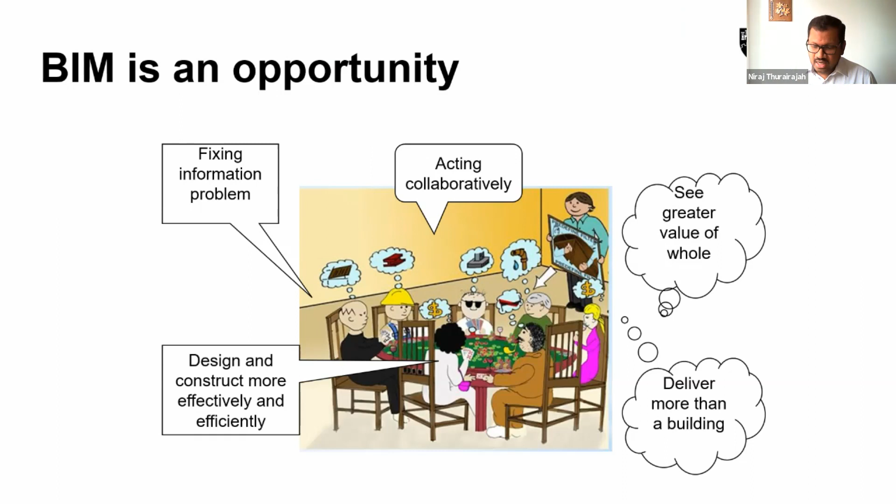Now, governments see this differently. This is from an engineer's, from a contractor's point of view, but governments see this as something that allows people to communicate with other sectors and other buildings. So they are not just talking about a single building, they're talking about a series of buildings. Let's say the Ministry of Justice decides to bring all the buildings in Sri Lanka onto a digital format connected to each other, so that there is a standard for each and every building. We know when something goes wrong in a building, we know what is going wrong in the building.

So governments normally, in the UK, there was a report in 2015 called Digital Built Britain. That particular report talked about how different industries can come together. So you have a building and there is a problem in the water supply. Yes, it's a building related problem, but it is also a water supply related problem. The ability to identify there is a problem and then connect with other industries is very important.

So the idea for government is to use Internet of Things. You would have heard of sensors, so put sensors in the building. Without connecting sensors to a model, they're just sensors that produce numbers, they have no meaning. Once you have sensors in places attached to a model, then you know in a digital representation what sort of information, the information about the building on the model, live data on the model. So when there is a problem, then you can identify and address those things. And you can see that is where this Internet of Things, Internet of Smart Construction and Services comes into play.

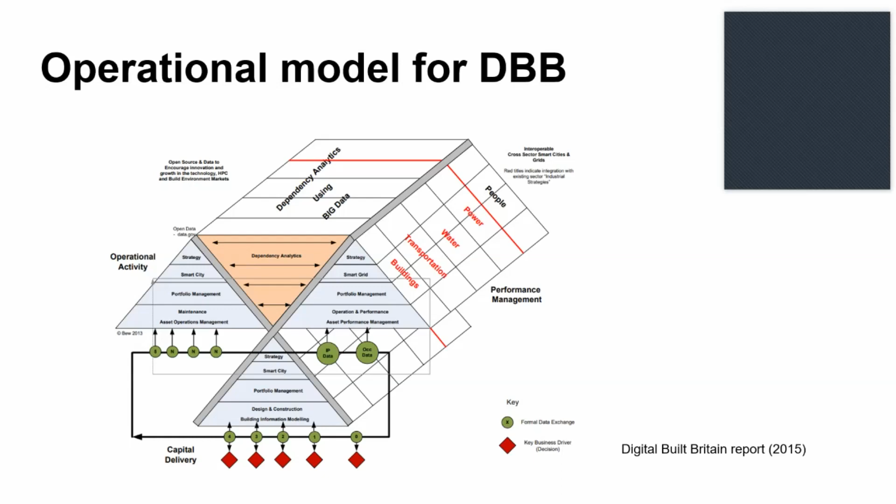Sorry, is it? Okay, okay, so.

Let's talk about building information. I talked about why we need to do building information modeling, why governments are pushing everyone to do it. But now let's talk about what we can do with it, what to do with building information modeling.

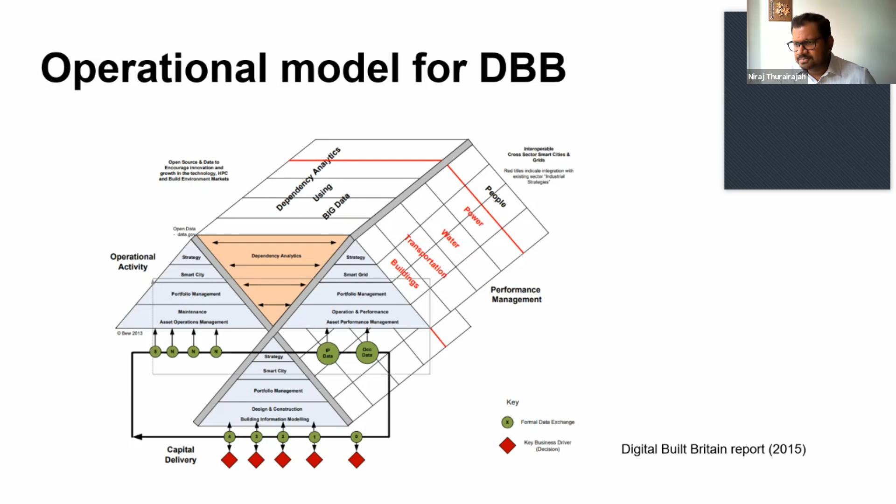So we are going to talk about how to implement and use this. I'm going into this idea of building information modeling - we are going to talk about implementation. How do we use building information modeling? I'm going to take three different perspectives so I can go one by one.

I'll talk about, first of all, the process perspective. I'll move to the product perspective, and I'll talk to the people perspective. There's a comment, and I quite like this comment, trying to understand positives and negatives for building information modeling.

I think positives are overwhelming, but at the same time it's important we understand the negatives, understand the challenges to move forward. Because I believe at some point it is going to happen to all of us. So if you are an early starter, you have an advantage. I think that's important. That's how I saw it, and nowadays I do various different things because I started early on building information modeling.

Okay, so let's go into the process perspective. Building information modeling normally adapts a perspective called integrated project delivery, we call it IPD. The idea is that it is slightly different - it is different from the traditional delivery.

And I think it allows you to bring the project in a much shorter time. Some of you may use the term novated design and build procurement method - D&B. It's very similar to the integrated project delivery mechanism.

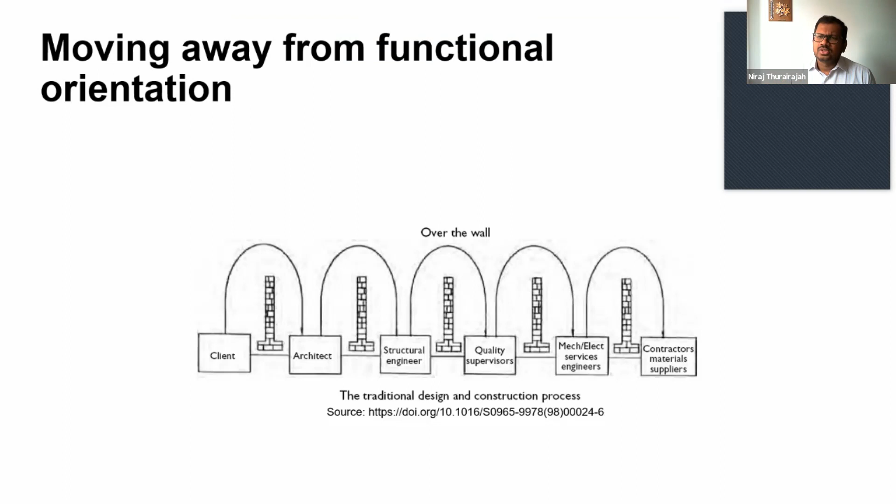You would see more of these things in Sri Lanka, not just in Sri Lanka, even in the UK it's the same story. There are projects which use very similar models. But a lot of people have recognized this is not working. This over-the-wall approach is not providing optimized solutions, so they want to break that and move to a much more collaborative environment in which they can work. So they move on to something slightly different.

I'm comparing two things: a traditional design process against an integrated design process. In the traditional design process, what happens? The client and the architects work together talking about what the project is, at the very beginning. Then they produce construction drawings, which show how they are going to do the work. Then they go to tender, select a contractor, and ask the contractor to finish the work. That's the traditional way.

What is the problem here? We are deciding what we are going to build without any understanding of how we are going to build, or who is going to build it. And that is a problem. So integrated design allows something slightly different.

What it shows is that at the very beginning, instead of just designing your project, you select a handful of contractors, maybe only 2, maybe only 3. You go through an early-stage process to select a few contractors with whom you can then work together - the client, architect, and contractor start working together in producing solutions.

So at some point in the project, at the tender stage, you have now 3 designs, with 3 different contractors, if you've selected 3, each going about the particular project differently - let's say you wanted an auditorium. Different contractors will come up with different solutions working with the architect. They won't be that different because the architect guides them towards a particular end goal, but there are different solutions there.

This is called integrated design delivery, or integrated project delivery. Most government projects in the UK and specifically in the US are moving towards this sort of delivery, because it allows people to start early and realize the potential of the project.

There is also a slightly different reason for it. This is called the MacLeamy curve. If you see number 1, the white curve - almost hidden - it shows that if you do changes at the very beginning of the project, it has a huge impact on what it's going to look like at the end. If you want to change things in the latter parts of the project, it has very little impact on what you produce as a building. So try to do the changes as early as possible.

Now in terms of cost, at the early stages it's very cheap to make changes because no one has done any work yet. It becomes very expensive to make changes in the latter part of the project.

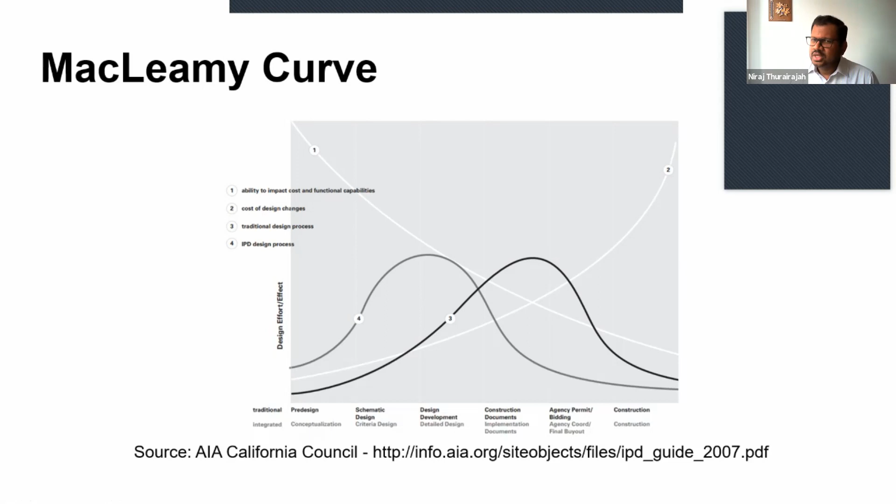So that is number 2. They have mapped the traditional projects against IPD, the integrated project delivery, and they show that actually you spend less because you make changes at the early stages and have more impact on the design from the early stages. Overall, you produce a better project.

So that is a process perspective for building information modeling, because that is what most governments, especially in the UK, US, and Middle East and various other countries, are trying to push - a much more integrated way to approach building information model used projects.

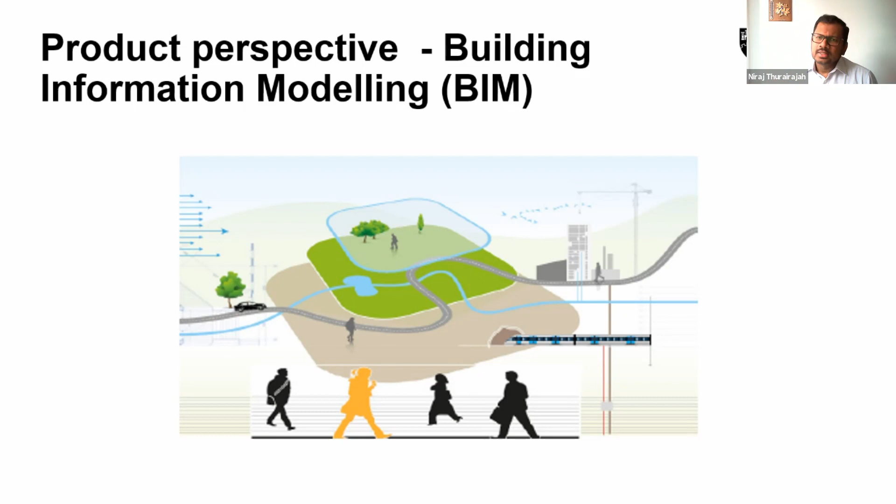Now let's take a product perspective. Let's talk about BIM as a technology, as a digital tool that you can use. A lot of you would have seen BIM as a digital technology, as a software. Remember, they are all combined together, it's not separate, but when we separate it and look at it, this probably gives more meaning if you're thinking about BIM as a product, as a software. So what does BIM as a software enable you to do?

What normally happens in modeling or drawing is that you have different sets of drawings coming from different people. Similar to that, in models it's the same story. There is an architectural model, a structural model, a mechanical model, sometimes a separate plumbing model or electrical model. So there are various different types of models.

I worked on a project, not a big project, a small project, but they had 7 different models, and one of them is the model from the specialized lift contractors, because they had their own model, own BIM model, designed on how things are needed for them.

Now, you can look at them, you can print out separate drawings for all of them, but the problem is that they are all separate. How do you imagine them all together in a single 3D space, a single environment? Normally, as engineers, you would do that thinking - you would bring that in your head. Okay, this is how the architectural drawing is going to look like.

This is how the MEP is going to look like, or this is where the wire is going. You are imagining that in your own mind. It's very difficult, and normally you wouldn't see that in drawings - how these things are presented. They are not presented in drawings. So it's always a difficult thing to do.

How many times would you have seen where a duct or pipe coming together in the MEP design shows that it has to cut through a column and go to the other side, because people haven't decided on the size of the duct, so later the duct got bigger. So in the drawing it looks like the duct has to go through the column. And as we all know, it can't happen - we shouldn't do that, otherwise the building will come down.

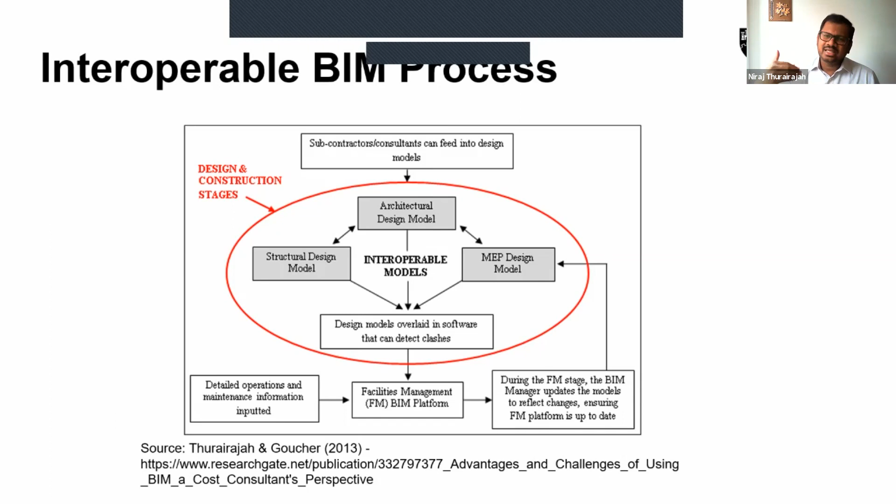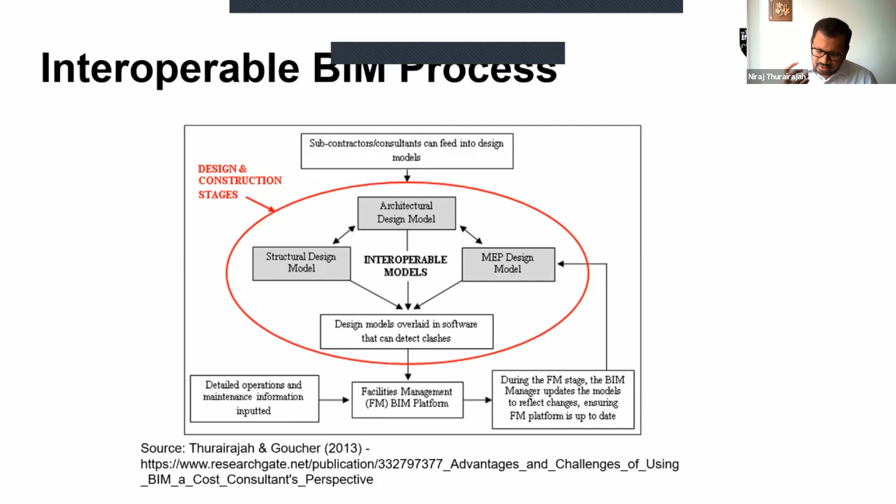Once it's handed over, it can be used for operational and maintenance purposes of the building or asset. So you can see it goes beyond just a single model for a particular purpose. It can be updated and used for various other things. That's how the technology and the BIM model works.

Now in the UK, and this is widely accepted across the world, this is how we define levels when it comes to BIM. If you are using just paper and nothing else, we call that level 0. When you are in level 1, you are using 2D drawings and 3D models, but you are not actually connecting them. For example, you are not putting these models together.

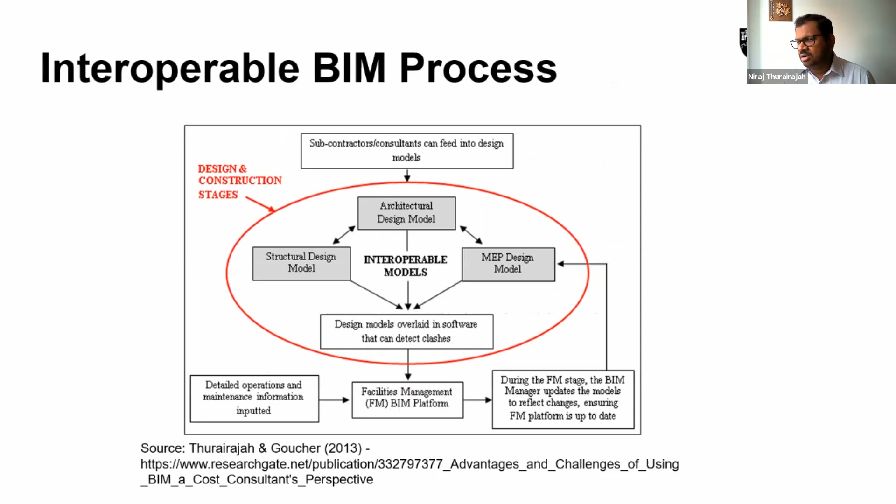I talked about different models coming together in a federated model. That doesn't happen in level 1. It's just single models, people producing them for various different purposes. This is where, like in newspapers, you see digital visuals of housing and things like that. I've seen this in Sri Lanka, and they are 3D models. I call them dumb 3D models because there's no information behind them, they just look like a building, that's all. That is level 1 in that sense.

Now level 2 is what we normally push everyone to move to, where you have models that have information behind them. So when you have a 3D model with a window, when you click on it, you know it's a window, you know what sort of glazing it has. You can get information about each and every product component in a model, and that is BIM-based design. That is level 2, and at the moment we are proposing that level 2 happen.

Now level 3 is where we start integrating everything else. Remember I talked about digital built Britain, about models connecting with other industries. You put sensors in, let's say in a water pipe, so you know the flow and the problems in that flow. Let's say after some time your sensor tells you the flow is reduced between this point and another point, so you know there's a blockage in between. Things like that can be done at the next level, that is level 3. That's where governments want to move, that's the next stage.

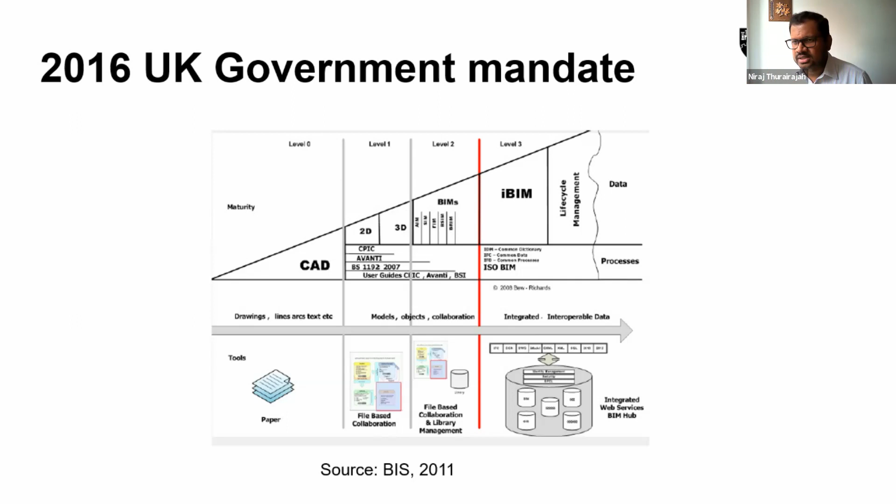So what are the benefits of using building information modeling? Someone asked what are the benefits, negatives and positives of it. First of all, the idea is, as people sometimes say, it's a single truth, meaning everything is in a single file so you can always go back and say this is where the information is. This is important because normally you see different types of information in different places. A single file allows you to bring all of them together in a single place and provide that information to be shared. That's very important.

Second is parametric objects. What do we mean by parametric objects? Let's talk about walls, windows and ceilings. If you have ceilings and walls in an AutoCAD or CAD model, you put a wall all the way to where the ceiling is, say 4 meters, and the ceiling comes on top. Let's say in the model, instead of 4 meters you say only 1.5 meters, but the ceiling is at 2 meters, meaning there will be a gap. That's what you would normally expect in an AutoCAD or CAD environment.

In a BIM environment, what happens is each and every component, such as the wall, is one component, the ceiling is another component, and they all share a relationship. For example, if you lift your ceiling by 10 centimeters, all your walls will automatically extend to fill that gap. You don't need to do it one by one, because there is a relationship in the BIM model that says the wall should be connected to the ceiling. So if you lift the ceiling, the wall will automatically extend.

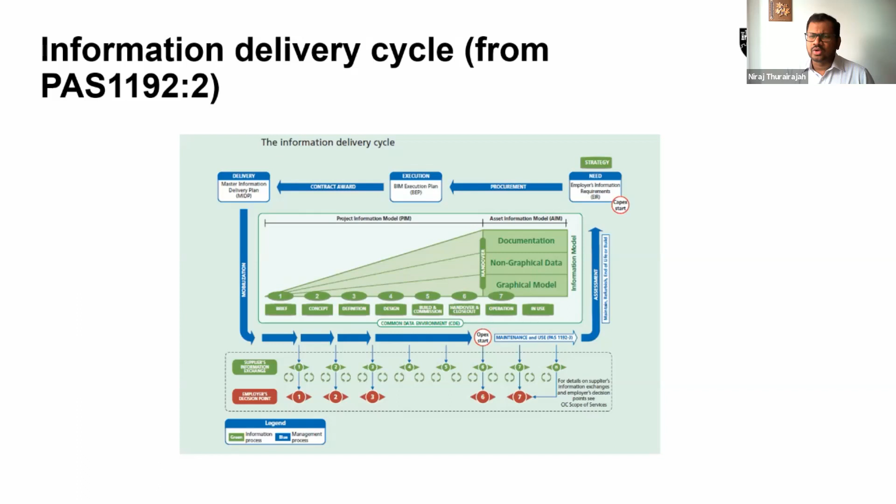Now then we go into construction, you have a master information delivery plan. In the UK, contractors and consultants are guided by certain outputs of information, producing different sets of information at different stages. At the end, you produce as-built information, the as-built BIM model that could be used for other things. So the standard talks about various different things in that project. I'm not going into full detail since we're mainly talking about what this is, but this is much more detailed information on what needs to be done when using BIM.

Now the important part I'm going to talk about is the people perspective. We talked about IPD, integrated project delivery, as the process behind building information modeling. I talked about the technology and product view, what sort of technology could be used, and details in the earlier section. Now I'm going to talk about the people perspective. I think this is very important.

The idea of whether you want to use BIM or not to use BIM is very much a people perspective. It's very much perspective from people who are in the project, the client who is running the project. So that's very important to understand. So we are going to take a people perspective in this case.

Most of the time, if you are new to building information modeling, people get a bit confused, and people normally avoid it. Oh, I don't want to get involved in building information related projects. This is not going to do anything good. It's just information and people can take this information and run away. I worked with a lot of quantity surveyors and they say, if I put information, people will take that information and use it somewhere else. And that's not true, but that's how they think about it.

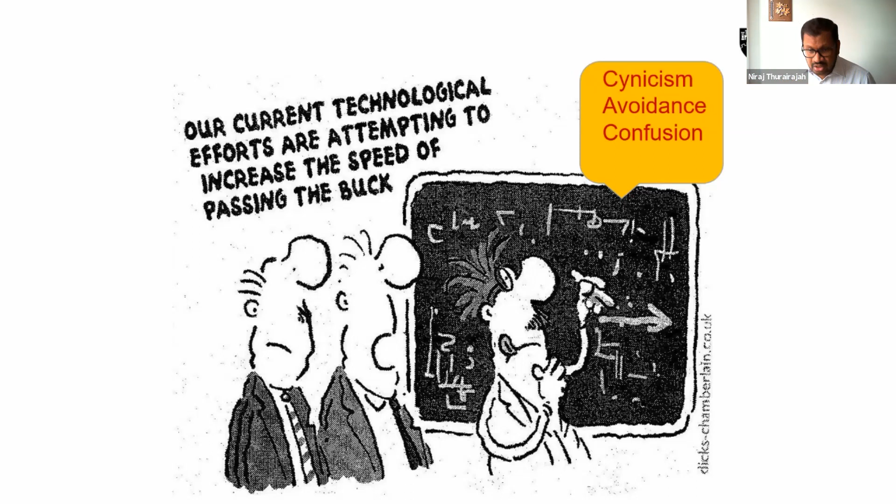So it's quite difficult. This is where we start. If you are not used to building information modeling, it's a change, it's new, so it's always a bit of a difficult thing. That's where we start from.

And of course, there is a hype behind BIM. A lot of people talk about BIM as something big. You can do that and things like that. What is happening with BIM in the UK and other places is that there was a big hype in the early 2010s, 2012, 13, 14.

But then it reduced, and now we have settled down and said we need to use BIM. How do we use BIM? So we have come to that stage now. The hype has sort of gone down. At the very early stages, it's a major hype, nothing major than that. So it's important to understand that certain products could be hyped, and it's important that we go beyond that hype to see what is its potential and how do we use that one if needed. I think that's important.

The problem with BIM is about managing the BIM use. I think that's very important. If you are working in a BIM project, it's about how do you manage to make BIM work. I think that's also very important. It's just a model, a process, a set of guidelines. It's not going to do it for you. So how do you then work with BIM and other people in making it work? I think that's very important.

As you know, people are different. Everyone thinks differently, works differently. Every organization is different. In a project, there are several different organizations. And as professionals, you are involved in various different tasks, and the information that you handle in each and every task is different. Some of them are geometrics, different types of information comes to you. So you can see how chaotic it would be when we are trying to work in this environment.

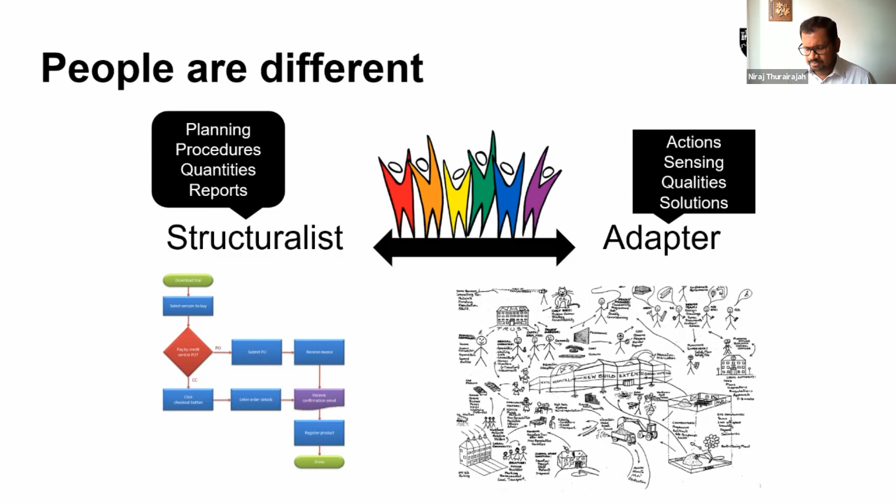Calculations are your normal ways of doing things. But I don't want to stereotype structural sort of engineers in such a way, because I have worked with engineers who are much more adapters. So it's not easy to say, it's not a general view. However, most of the engineering courses allow you to, or make you think in a very structured, methodical way. I think that's important, that's what your learning goes into. And when it comes to tasks, there are tasks that need judgment. So you judge a certain situation, look at the people, and make a decision.

There are calculative tasks that allow you to say what is the size of the column, or what is the size of the reinforcements you need to put in a particular column. That's very much the calculative part. As an engineer, part of your learning is about calculations and how to calculate those things.

That doesn't mean you're not making judgment, but there are a lot of calculations involved. Building information modeling is a really good tool for someone who's more calculation oriented, as well as someone who sees the world in a much more structured manner. So for most engineers who are taught in a calculation-based, structured way of learning, BIM is an ideal thing to look at. But that does not mean you are not adapting judgment.

This is where it's important that you work with people and understand how to make judgment when the calculation doesn't work, when the standard tables don't work because the situation has changed. So you have to come up with new calculations or make a judgment from what your calculations show. It's important to see the world differently in that sense.

Now, the important part is don't try to use BIM for everything. I think someone asked this question, trying to understand the negatives and positives - should I use BIM? It's very important to understand that BIM is not appropriate in every situation. If the situation is very chaotic and complex, BIM will allow you to structure it. If the project is simple, sometimes using BIM could make it more complex. So it's a judgment call for you to see whether you want to use it or not.

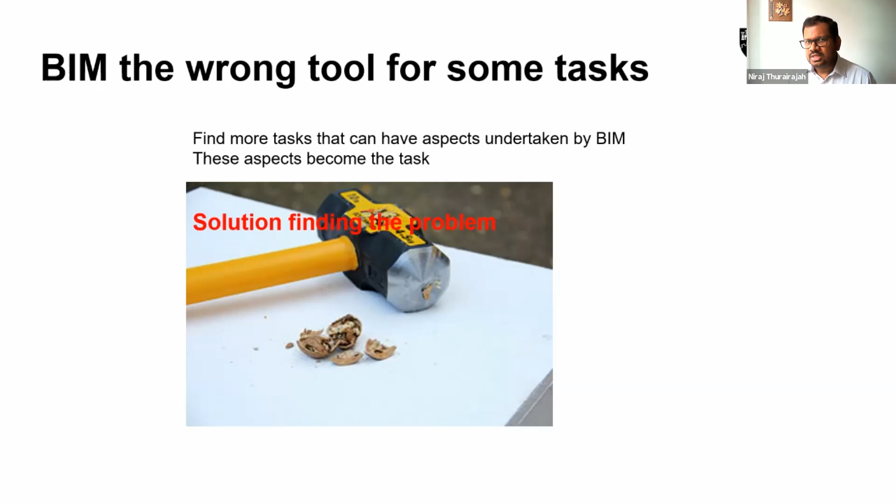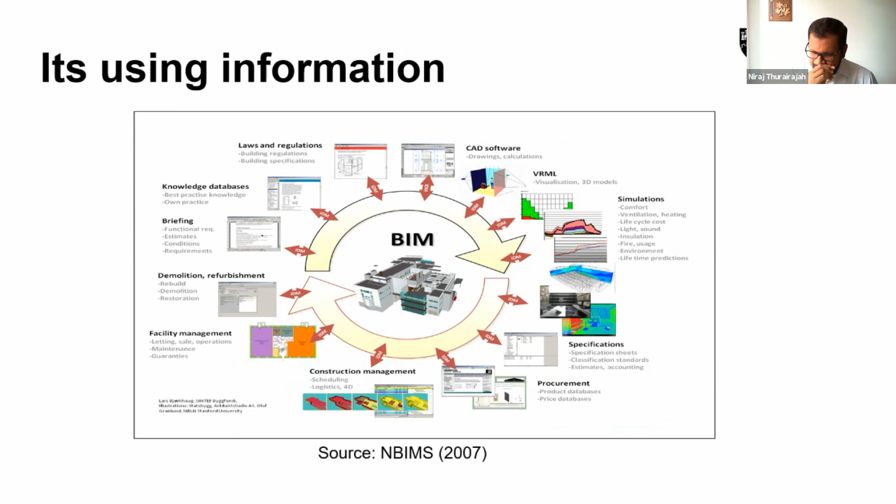Now, an interesting question. I worked on a project, and this was their first project, and the project manager said, provide all the information that you have. Everyone provided information, and later they found there was so much information they couldn't make head or tails out of it. So on the second project, they decided they would specifically ask for certain information. It's important to understand BIM could be used in various different projects, and at various different stages for various different activities. It's all about information - understanding how that information is used and what benefits you can get out of it. I think that is an important task.

In a project environment, when it comes to building information modeling, remember BIM is only part of the project - it only provides partial information of the project. It is not the project, it's a 3D environment. I have seen project managers trying so hard to manage the BIM model that they forget to manage the project. It's important - the project is separate. The physical environment needs to be managed on its own. The BIM bits allow you to manage it better. Don't try to manage the BIM on its own.

So that's why normally we suggest bringing a different person to manage BIM, but if the project manager, engineers and architects don't understand what BIM is, then it cannot work. So the understanding is important from the point of view of engineers, as well as from the project managers, modelers and information managers.

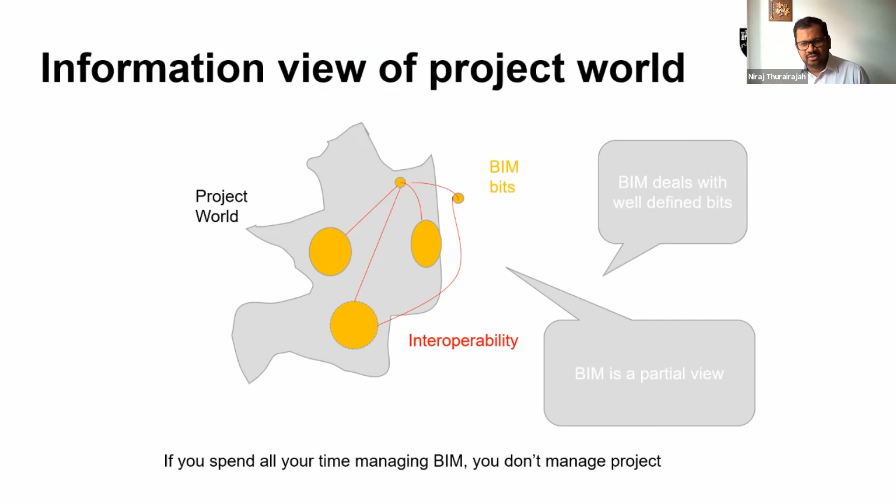The most important part for me here is that BIM only provides a partial view of the world. Therefore, it is important that we see the normal project as a project and only see BIM as partial information.

Some of the concerns and issues I found, and I'll go back to this later, is that sometimes there's an issue of interoperability. You're working on one version of a software and transfer to a different version, and suddenly windows or staircases are missing. I think that's a problem. It's becoming better now, there are more rules and a common platform to transfer. But if you're using old models, that could be a problem.

The famous example is a French software called CATIA. It allows people to model parts of aeroplanes. One of the Airbus projects had a problem in design because they used two different versions of the software and ended up missing certain parts, which led to a major information-related problem. So it is important to watch out for interoperability issues between different softwares and different versions of the softwares.

Again, it's important for us to know that it is professionals who are involved in the work. The information only provides a partial idea. You can't understand the whole thing by just looking at the digital models, it's important to talk to people. So sometimes the meaning can be lost because we just see the digital model. It is a concern because a lot of people just see the model and say, oh, we got the information. It is not - there is someone designing those things behind all the models, the information and the numbers. It's important for us to talk to that person and get them involved in the projects.

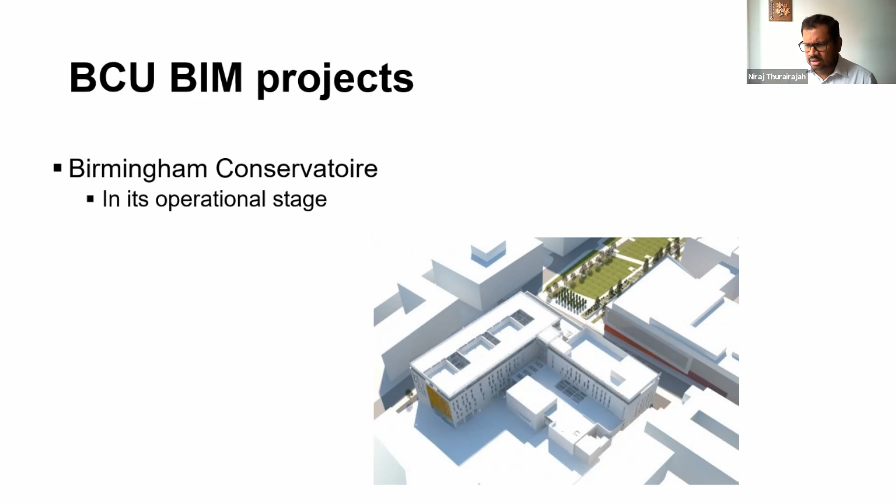I got involved in three different university building projects in Birmingham. One is called Parkside Building, the second is called Curzon Building, and another one is called Birmingham Conservatoire. All these buildings are completed now. They have BIM models and are in the operational stage of the building.

Before I go into this, I'm going to show you one of the buildings and how it was built. Okay, pardon me, I'm going to switch from one to another. I thought I got the correct one. Sorry, let me open this. Okay, I don't think you can see that yet. Give me a second, let me share it.

Okay, I hope you can see this screen. So this is a video of an actual construction of a university building. Can you confirm whether you can see it? Yeah, can see it. Okay, brilliant, thank you.

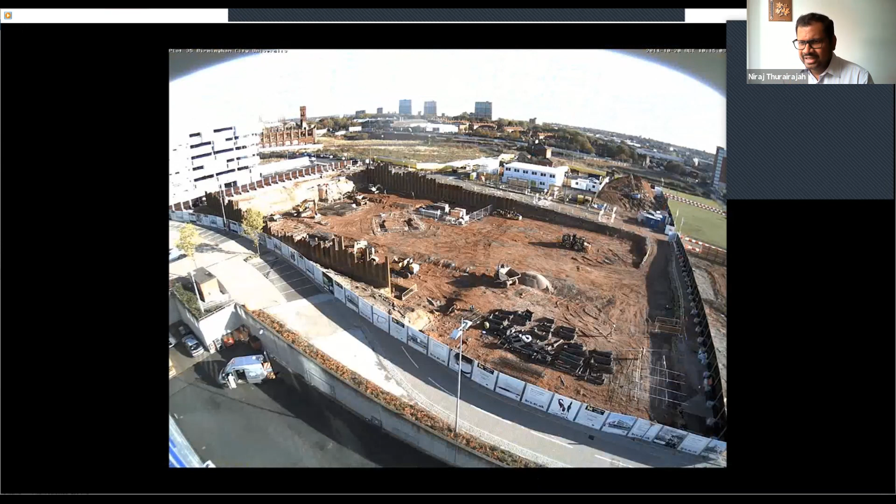So I'm going to run this one. This is an actual building construction, not a digital model. You can see what is happening there. There's no sound, so don't worry about that.

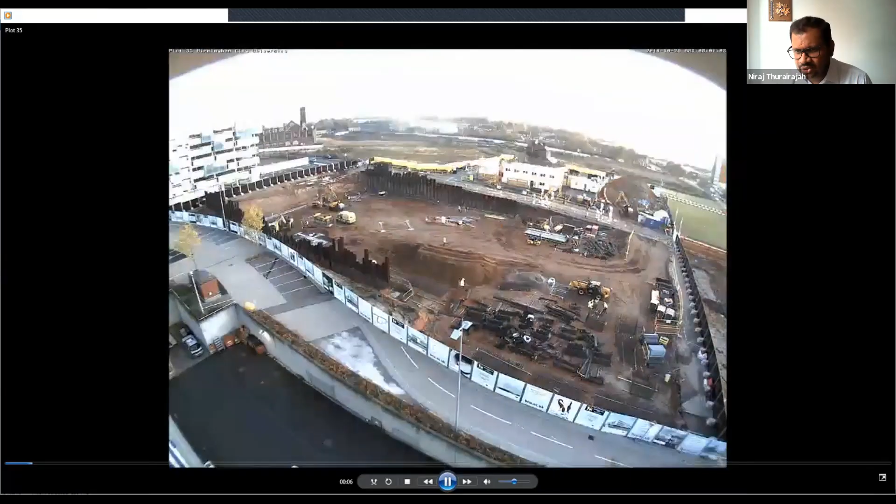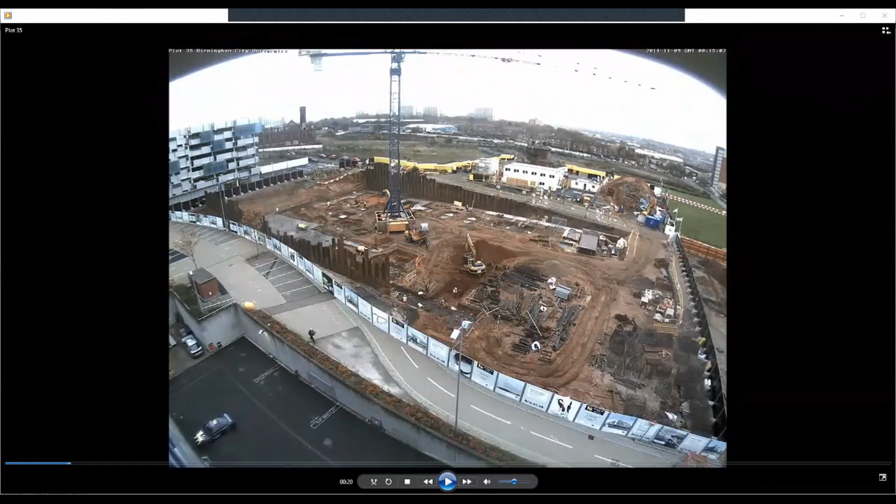We had a camera that continuously captures work happening on the project. I hope you can see it's moving. Sorry, can you see it's moving? Yeah, there's a little bit. I think your coverage is a little bit of a problem. Can you switch off your webcam? Then I think it's easier to view that video.

Is it better? Yes, okay.

So you can see the ground floor is going up. They have put a crane to start the building. You can see baby dumpers and various other things moving on.

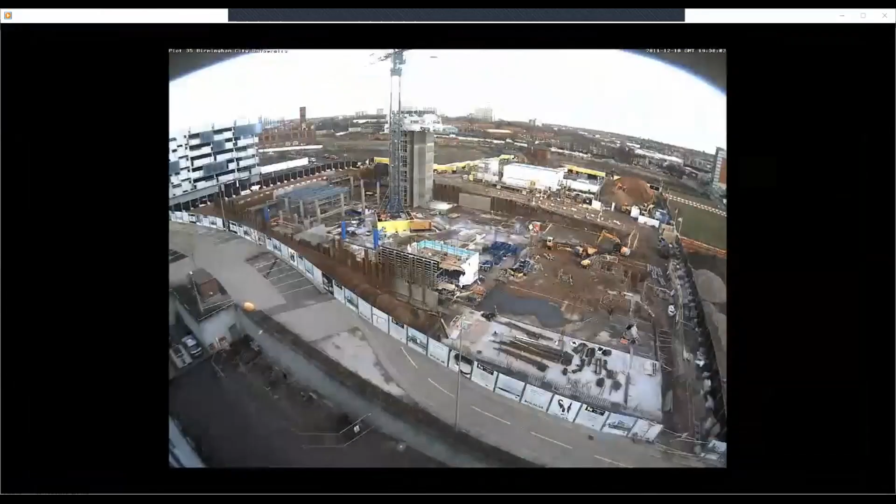So here you can see something is growing up, and we are using what they call a slip form building. It just goes up a few centimeters a day, 10 centimeters a day. You build slowly, the core is built like that.

And you can see they have finished the core, they are starting the external, and then now they are going to the second floor. Second floor is getting concreted. I'm going to skip a few seconds because you can see if the first floor is complete, the work is still ongoing, the concrete columns are coming up.

And the next floor will start coming up from there. So you can see the next floor being built. There are some construction joints, so not all the floors are built at the same time. I think there are three construction joints here, you can see three bits going at different times.

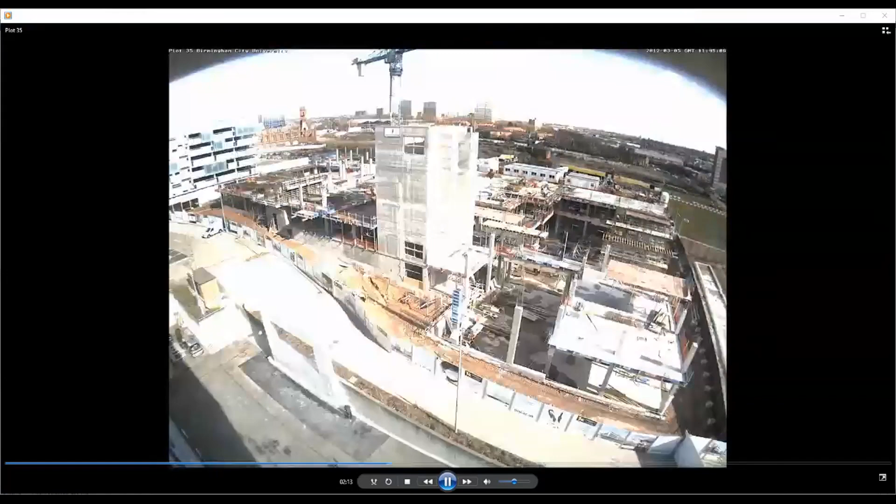We go to the next floor. You can see floor by floor, things are going up and people are finishing it. This area you see at the very front is an auditorium. They have taken 2 floors of space to build it, with columns on the back and steps on the side. What you see on the left-hand side is the connection bridge between the existing building and the new building.

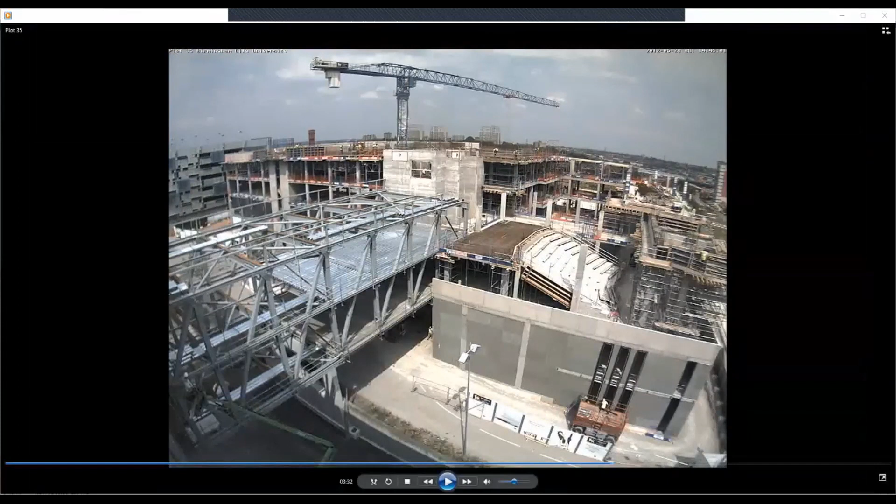Go on. I think the internet speed is a little bit slow. Can you pause and play the video? Yeah, it's stuck, not moving on our screen. I paused it. Okay, play now, it's fine. Play and wait a while, then if you go like that it's easier.

This is a bit fast - this is what we call a time lapse. You can see the last floor coming up. It's finished now.

So what you see here is that almost all the structural work is finished. Now the external walls need to go up, and once they go up, the internal work happens inside the building, which you won't be able to see from this camera.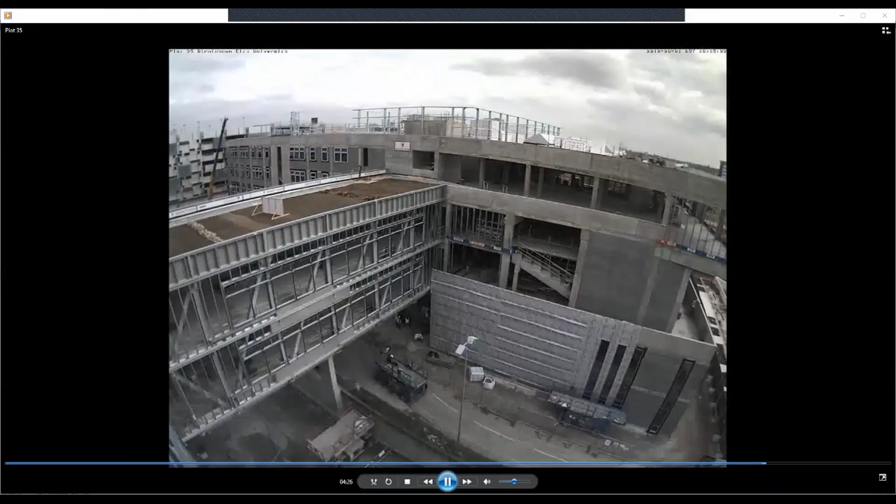You can see the external work getting finished. The walls are being done, the windows are going up, and now almost the whole external part of the building is finished.

Now look at the last bit of it. The external part is finished, the internal part is happening. What's happening outside the building is the cladding coming on - people are adding claddings and struts, and they're all coming up. So the building is finished. Let's get back to the presentation.

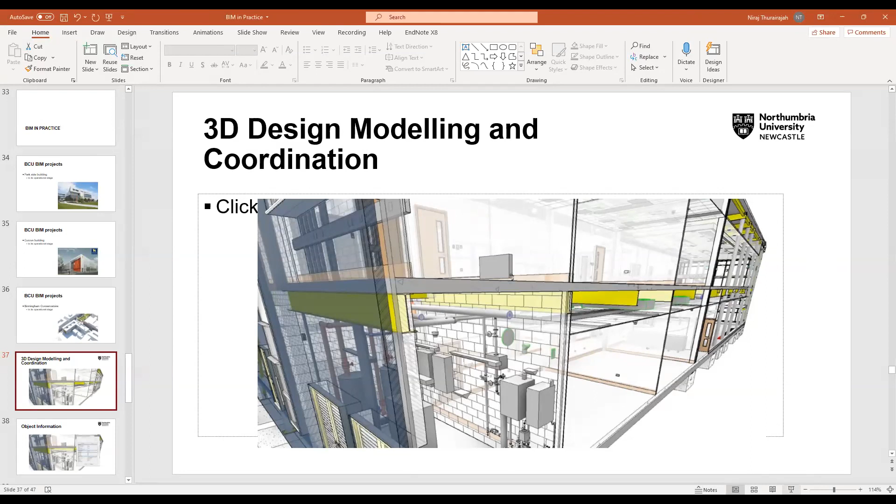Hope you can see, I'm back to my presentation. I gave you that example because I want to show something slightly different later. So that's the building we are talking about - inside the building there are lots of different models and things like that.

What I'm showing here is part of the building where you can see some of the electrical and plumbing work, some tabletops, and struts going up. This allows you to coordinate those things. We use something called BIM 360 - it's almost like a chat function, so people could say this is missing, that is missing, or that part is missing. Then you can see bits and pieces, break down a piece and see what needs to go in and how to fix it.

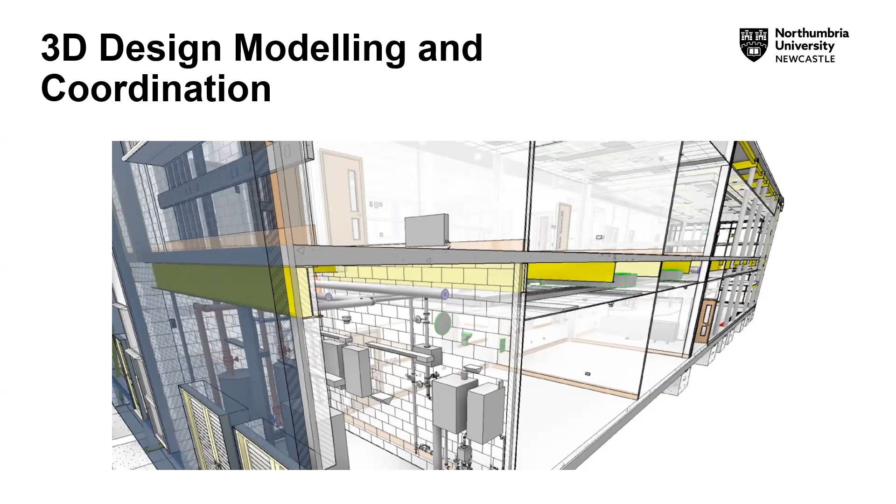Some of the models you see come from manufacturers - they provide the models, so you don't need to model it. Manufacturers provide a BIM model, you just put that model here. So things like that you could do with modeling and coordination.

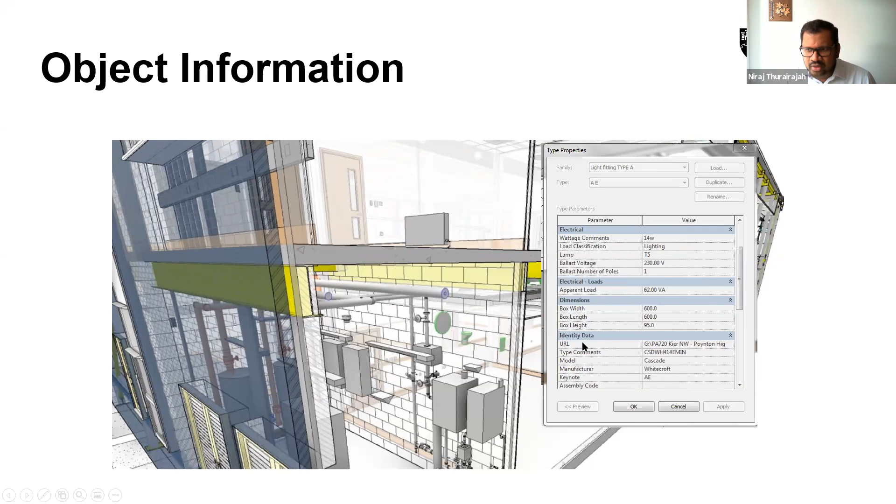On top of that, the other thing is about information. If I click on one of those things, it provides this information - it tells you about this electrical component, what is in it, what the dimensions are. You can even go and find further details about that building. So objects in models have information behind them.

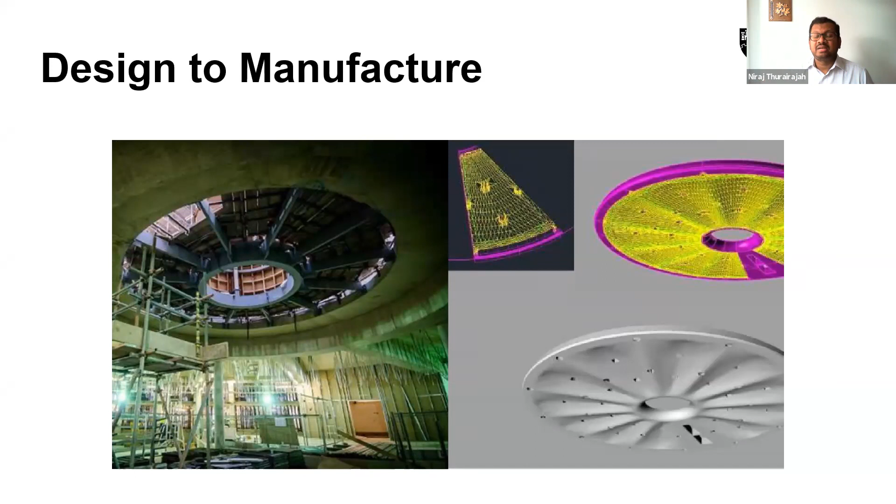You can also look at certain parts of the building and models and use those models to actually print them. In this particular building we printed certain parts, 3D printed certain coverings based on the model. It is possible to do that manufacture - we call it design to manufacture. You design it, send it to the manufacturer. This was on a small scale, but on a large scale you can contact a manufacturer, and they will manufacture that component for you and come fix it where it goes.

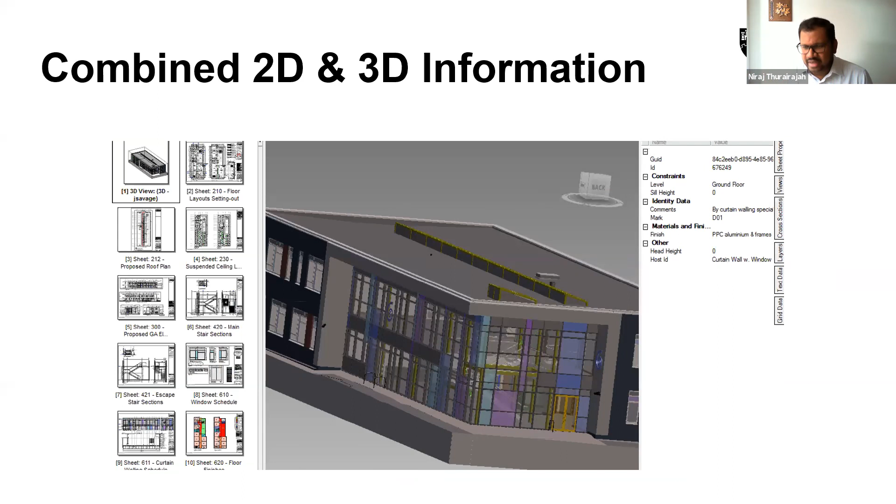You can also bring in 2D and 3D information together within the environment. So if someone wants to look at certain types of models and sheets, maybe you have colored those sheets, you can put those things as part of the references so people can look at that and make sense of it.

You can also do a 4D simulation of the building. So you have a building, and a program, and a 3D model of the building. If you connect the components to the program, it becomes a 3D, 4D simulation, a time simulation. Let me show an example of a time simulation we have done before.

For the same building I'm talking about that you just looked at, this is now just a 3D model and programming. It's a time simulation I'm talking about. Let me put that up. Hopefully you can see that screen.

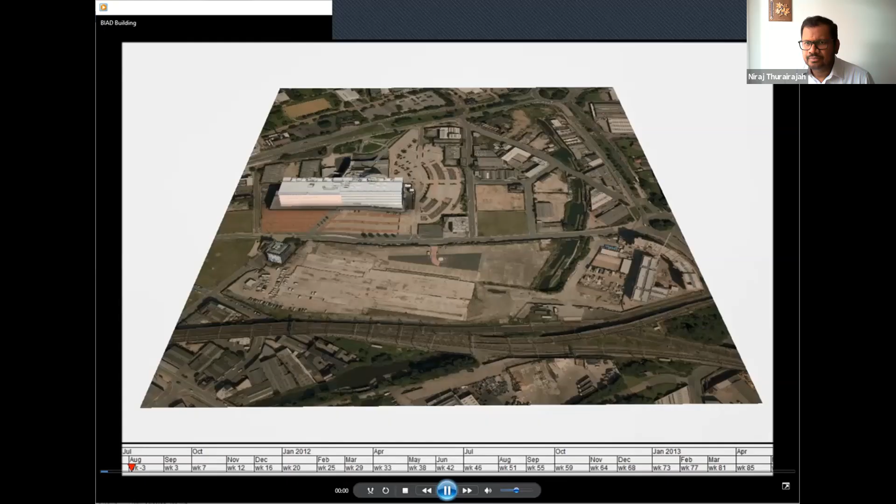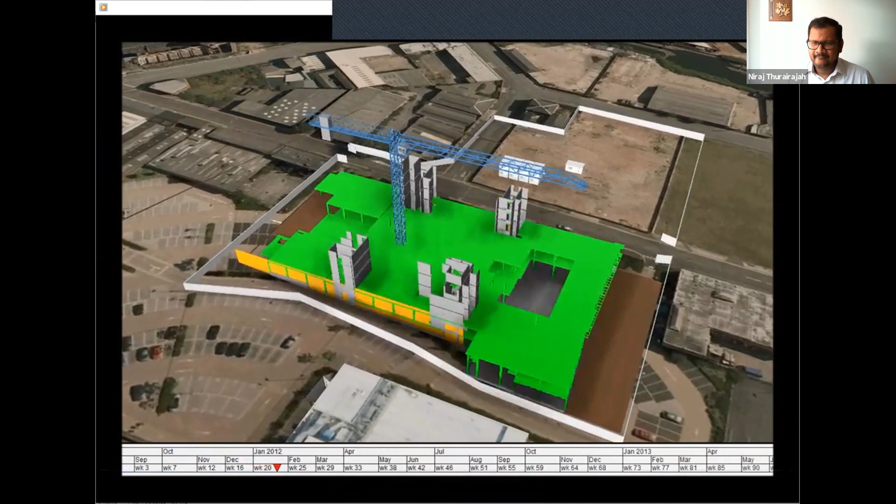So this is the new site that we talked about. The video you saw earlier is this area. That is how the first thing came in, if you remember. The next thing came in, the floors are coming in. It's the same building we are talking about.

Now this is connecting components to the program. The interesting thing is this is a project we did while this building was being built, in 2012. When we modeled this, at some point we stopped and found that even the cranes were looking at the same side - it wasn't planned, but it just happened.

But you can accurately model it to a certain extent. If the project is not delayed, you would know when it is happening. I'm just giving you an overall view - you can actually go in and look at what is happening inside the project.

We used a software called Synchro to do this. If you are working on an infrastructure project, Synchro has become useful there too, because infrastructure projects have a lot of unknowns. You don't know how you are going to do the work - it's not like a building project. You have to actually do some construction work first, so that preliminary work can be captured, and Synchro as a software allows you to capture those things.

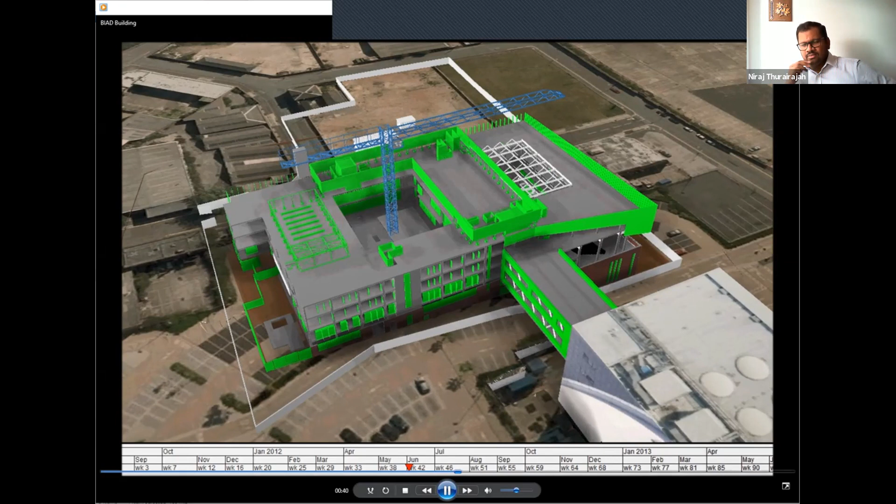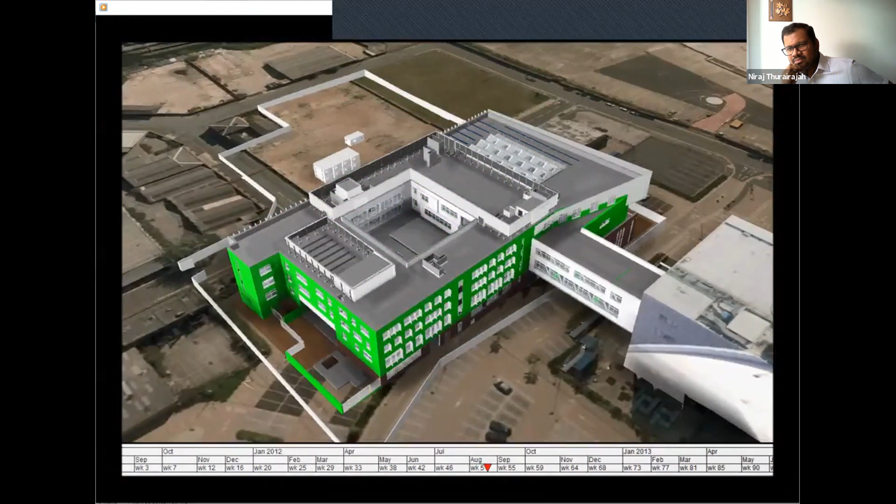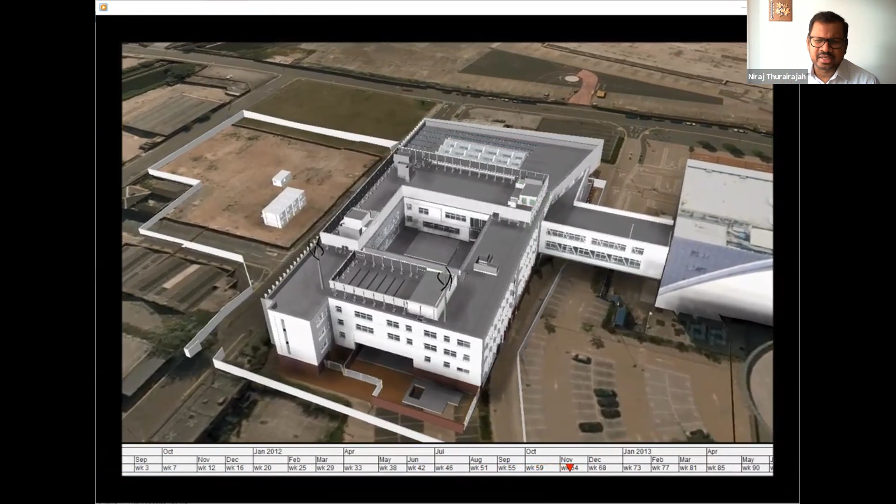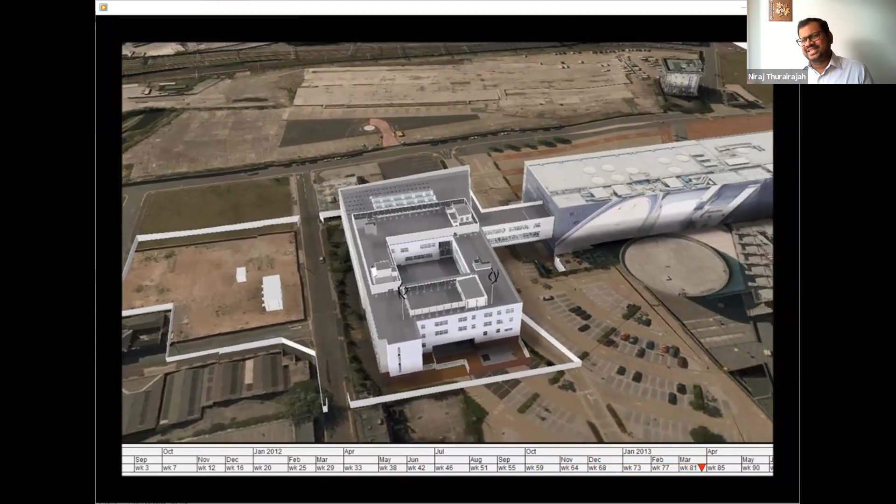So let it play this through. The green bits show that the work is happening, the white bit means it's finished. Now you can see, I don't see any green bits - is the building finished? The external bit of the building is finished, but it's still going because the internal works are happening. I haven't zoomed in, so you can only see the external bit of the building, but you can see how it is connected to the building, where this building is. It's a good way to connect these things together.

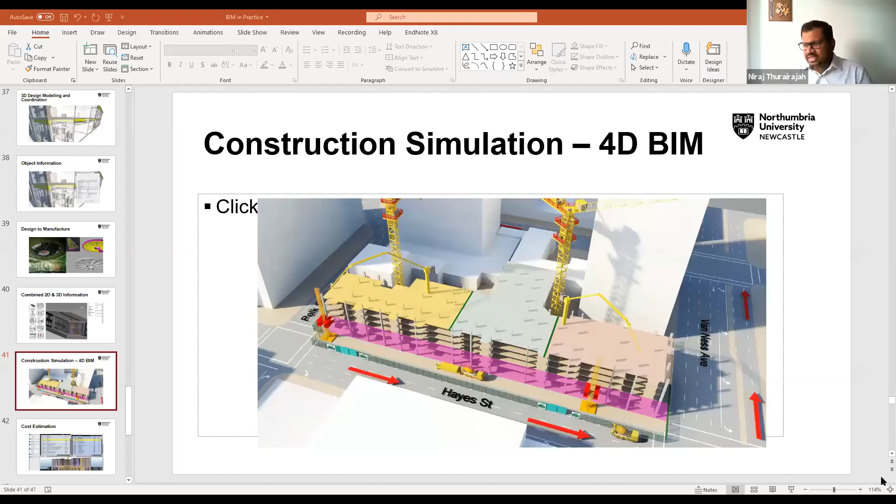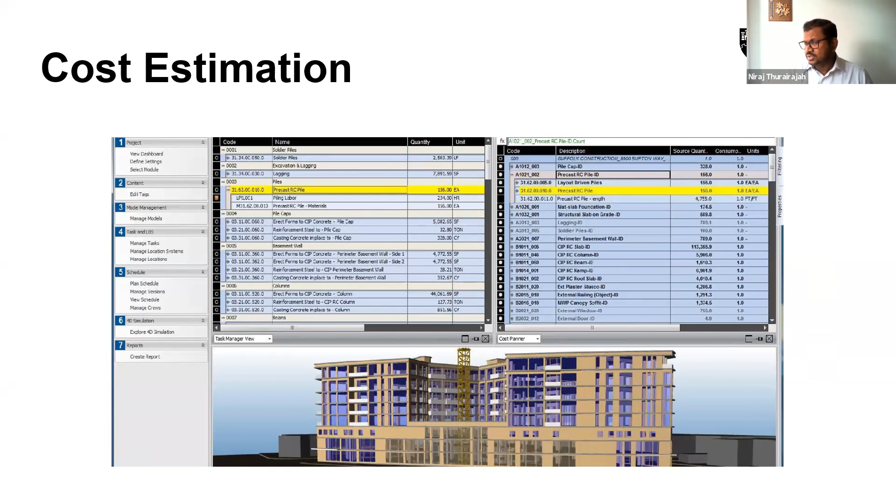So let me go back to my presentation. As you can see, 4D modeling is possible with that. Similar to that, you can do cost estimation by looking at these things and putting prices on it. Normally I would use a separate software, but still take the information from the model and do that calculation. So it is still useful, but not in the same environment.

So these are some of the things that we did and we can do with BIM and BIM models. There are other things that you could do with BIM models that I haven't covered here.

And nowadays there are 3D lasers. You can do laser scanning of existing buildings, scan them. You don't need to go and do everything manually. You fix the scanner in a place, let it scan, and it scans the whole building on its own. You do a few points like that and bring them all together in a software, in a process called point clouds.

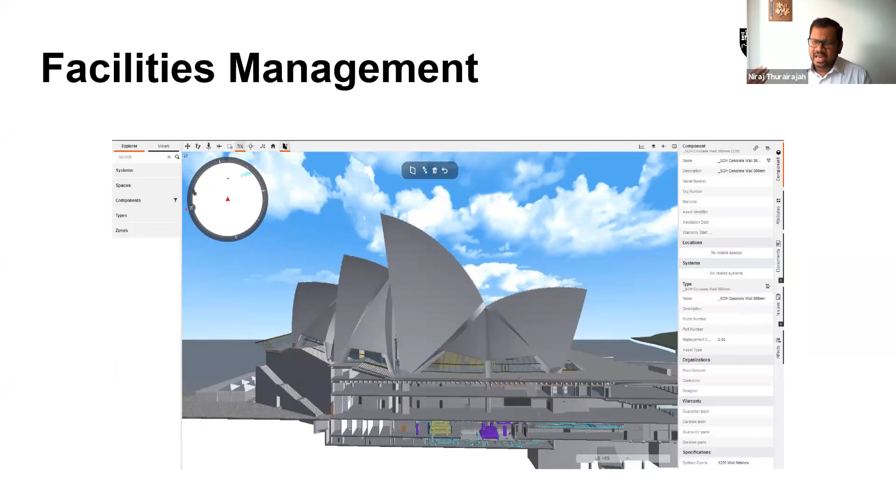Using that, you can construct a 3D model of existing buildings. So you don't have to just use it for new buildings, you can use it for existing buildings too. That's what we did here in this particular building, built many years back. We used that laser scan to scan the building and use that scan for other purposes. There are so many other applications, I won't go into details, but that's the advantage.

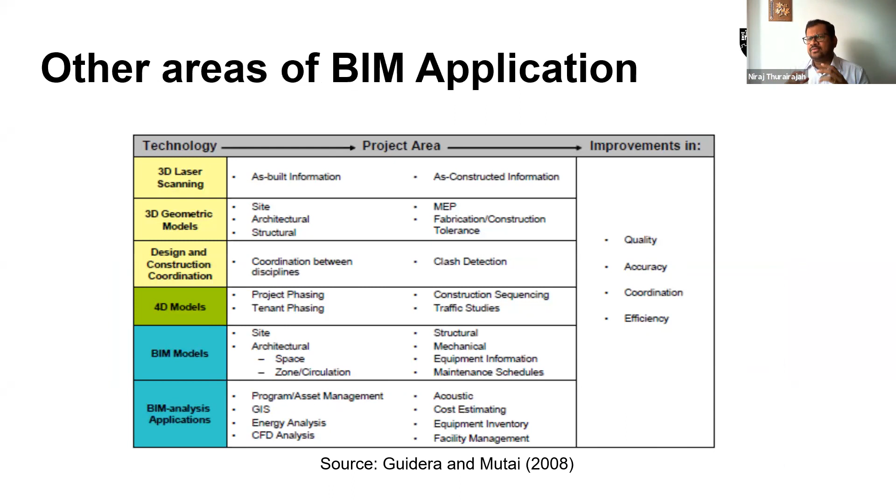Once you have an information model, you can use it for various different purposes. Some of the things we found in the projects I got involved in is that BIM is a very good tool when it comes to structuring information, communicating with people, coordinating tasks, and collecting information from projects. But we need to be mindful that it is not the project, it's not the building, it's only a digital model of the building, hence it only provides partial information.

The problem is that a lot of people get seduced by this 3D environment. It looks cool, so everyone is into it, thinking it's brilliant. It is not brilliant because it's cool and nice looking. It is brilliant because it carries information behind it. As engineers, we need to see the content, the things behind that model, rather than the seduction that comes from the 3D environment and the model you see.

One thing we learned from doing the work is to only ask for necessary information, not all information. If you're using BIM, it needs active management, the model and the project need active management. That's very important for us.

But even though we're talking about technology, from the projects, what we learned is that this is about people rather than about technology. It's about making people understand what is possible, what could be done, what we could use these models for. Otherwise the models don't have any purpose. Just producing a model doesn't give any meaning or purpose behind it. It's people who create that purpose and meaning, so it's about communicating with people and understanding what they want out of it.